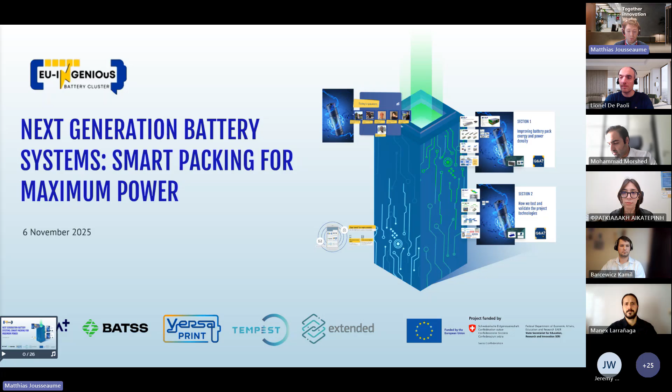So before we begin, let me introduce our speakers. I'll try not to mess up all the names. We have a lot of great speakers today, and I'll start with Mohammad Morshed at Avesta, representing Extended. Hello everyone, and thanks for your participation. This is Morshed from Avesta Battery Energy Engineering. Then we'll have Dr. Manex Larrañaga from CIDETEC, representing BATSS. Hi everyone, it's a pleasure to be here. We also have Lionel de Palmos from CEA, representing VERSAPRINT.

Hello, I'm Lionel De Paoli. Sorry, just a mistake on my name. No worries. And I represent the VERSAPRINT project. I think you didn't come alone, right? You were supposed to have also Abdullah. Exactly, Abdullah. I haven't seen his camera on. I think he might be joining right now. He's here. He will be also presenting VERSAPRINT.

Yes, of course. Great. We also have Katerina Fragkiadaki, if I say it correctly. Yes, you did great. Thank you for having me. And you'll be presenting Tempest. And we'll also have Kamil Barsevsevic. How did I do? Hello, it's Kamil Barcewicz here, and I will be representing NEXTBAT. Pretty well for the first time. Great. Without any delay, I think we can get started then.

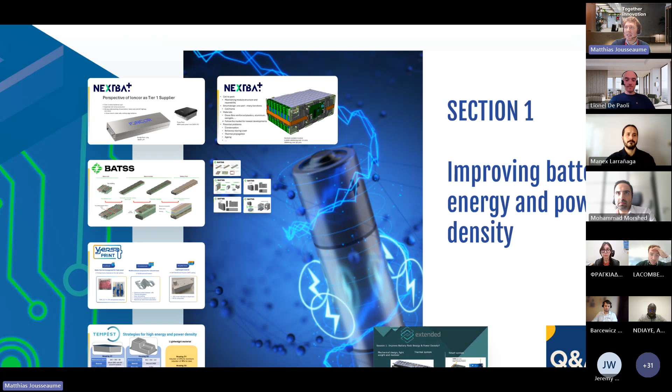You can see the different presentations. We'll go through each project. And like I said, once we're done with that, we'll go to a Q&A and have a discussion between the different experts about the project, about the perspectives for batteries in the upcoming years, and the new technologies, and all those things. But let's get started with NEXTBAT first, and I give you the floor, Kamil.

Okay, thank you. So I'm Kamil and I work at Ioncor as Senior Mechanics Specialist. And we are participating in the NEXTBAT project where we're making a semi-solid state battery module. And I want to talk about it from the perspective of Ioncor. We are a tier 1 supplier. We have expertise in serial production since we made over 3 million batteries that maybe you are using every day.

We have a strong understanding of the actual requirements of the automotive industry and all our clients. And that gives us this unique know-how to make safe batteries that are also manufacturable in serial production and don't break the bank. And I will tell more about it in the next slide. So if you go to the next slide,

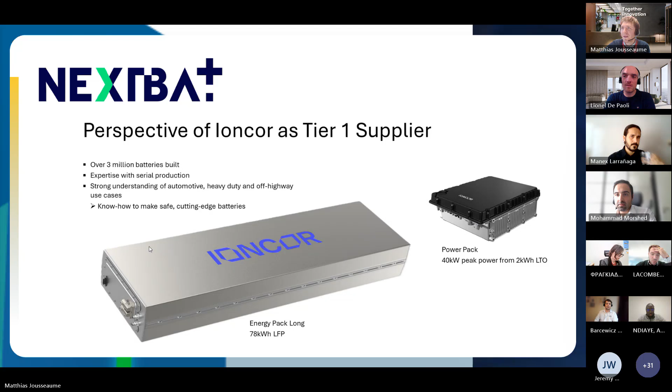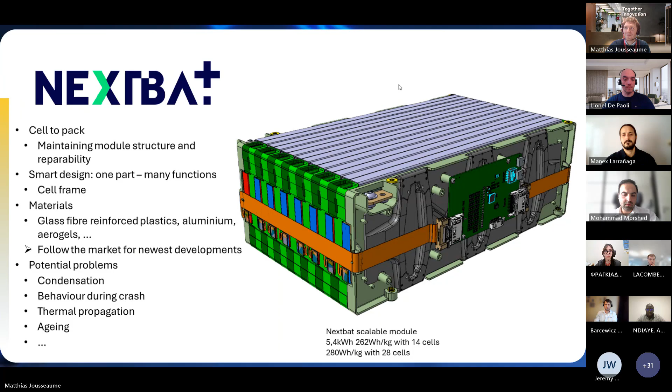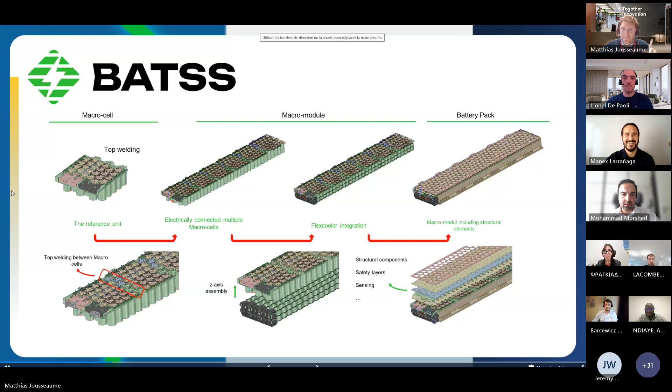Matthias, you are muted. Thank you very much for the reminder. Sorry, I was just saying thank you very much.

Kamil, we'll get back to you during the Q&A session, and now we can move on to the BATSS project. Manex, I give you the floor.

Now, this time I was the one muted. Okay, thank you very much, Matthias, and hi everyone. It's a pleasure to be here, as I said.

And now I will talk about how we developed in the BATSS project a high energy density and power density battery system that can be modular, scalable, and for different applications. And for that, the main concept we followed was the cell-to-pack conceptualization.

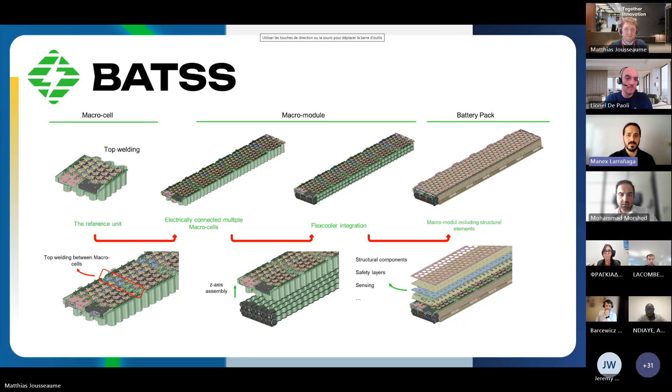Mainly considering the application constraints, instead of defining low energy and power density level battery modules to develop the configuration of the battery system pack, we use the cell-to-pack conceptualization to integrate as many battery cells as possible in the main battery system unit that will scale up following modularity concepts.

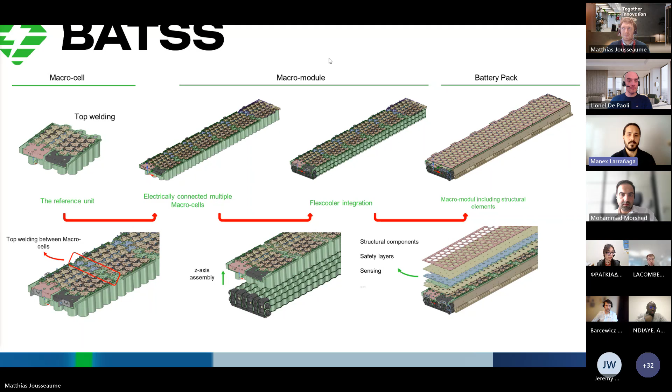So as you can see here, we defined a reference macro cell configuration that we stack in a linear way to form the macro module, the unit that provides the energy and power requirements of the application at the battery pack level. With this scaling strategy, we make the best use of the available space for integrating the battery system, which allows us to dramatically increase and improve the energy and power density of the application. Next slide, please.

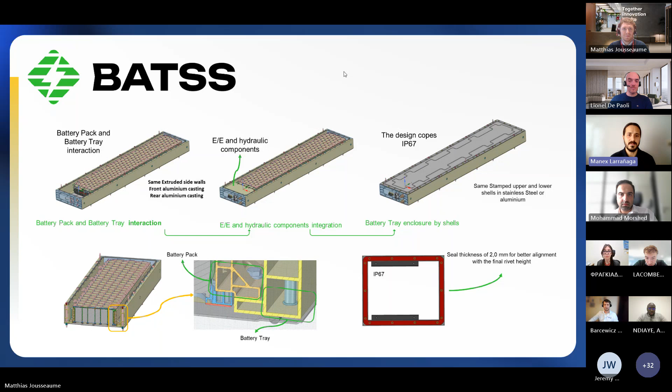Okay, after the development of the battery system, we show you here, we integrate all the electrical and electronic components in the design. We define the structural tray, and like this, we have the main battery pack unit that we integrate in the application. Next slide, please, Matthias. Okay, and like this, here we have the main application. As I mentioned before, the design we develop can fulfill the requirements of different applications.

And that's mainly because from the very beginning, we integrate modularity and scalability concepts in the design. Since we have the flexibility to include as many macro cells as needed to meet the energy and power specification of the application up to the battery pack level, and thanks to the structural battery tray and system design, we can stack the battery packs on top of each other to meet all the application requirements. And with the same design concept, we can easily adapt to different use cases in the project.

And that's really important because that was one of the main goals of this project. In this case, we developed a specific battery system for a high-performance marine application, off-road application, and to close the loop, we also address the second life application, making this a very interesting and comprehensive project. So as a summary, with this design, which integrates cell-to-pack conceptualization, modularity, and scalability concepts, we were able to use the same core design to address very different applications, such as marine or off-road, while maintaining really high energy and power density performance. And in the next slides, you will see the last designs of each application.

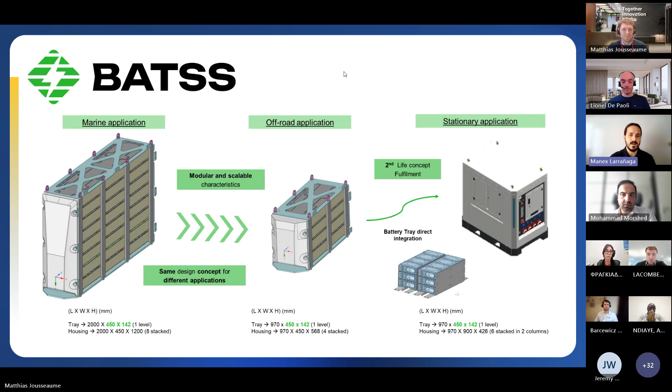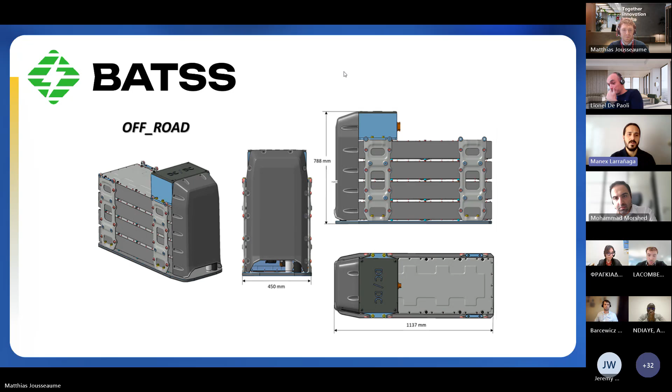This is for the maritime use case. In the next one, we have the off-road. And as you can see, the main design concept is the same, but we use this scalability and modularity aspect to go use case by use case. And finally, in the last slide, to close the loop, we have the second life application, as we can use the main tray of the off-road application to integrate directly in this second life application. And mainly, this is the main description of the design we are developing in BATSS, which I think is really interesting. So I hope that you like it.

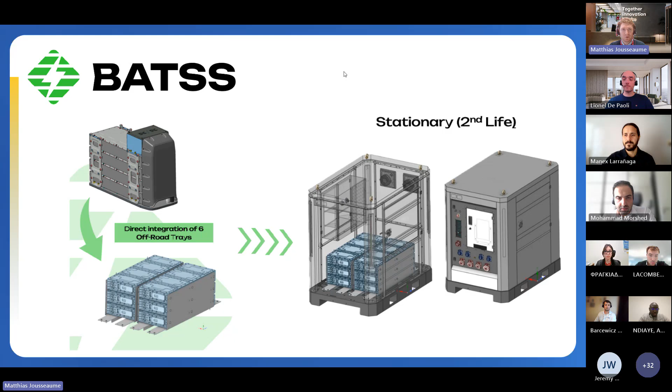Let's talk about the VERSAPRINT project. So VERSAPRINT, the name is versatility and printability. So the main strategy of this project is to develop modularity and multifunctionality with the building block aspect. So we've developed 3 main building blocks to improve the performance of the battery. First of all, at cell level, we developed a cooling channel directly on the cell that could be printable directly on the face of the cells, so it can improve the thermal aspects, thermal conductivity, and a high C rate.

We have a very good result at the end, and we can print with the silicone material directly on the cell, and we can have a channel of around 2 millimeters diameter, with good flow rates between each cell. And the second aspect of the building blocks, at the module level, in order to have a multifunctional component at this step, is to develop a multifunctional bus bar with several functionalities. First of all, to connect the power, of course, and also to disconnect one cell in order to replace it at the module level. We can improve the versatility and the second life.

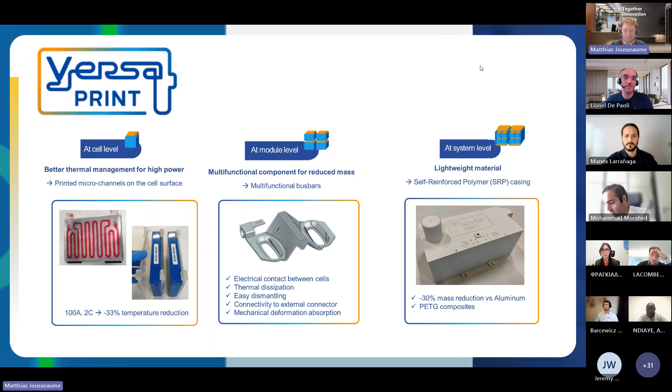presentations. But we'll move out from VERSAPRINT project and move into TEMPEST. Katerina, I give you the floor.

Hello, I am Katerina Fragkiadaki, mechanical engineer and a PhD candidate working in the Laboratory of Technology and Strength of Materials of the University of Patras. And I'm here representing the TEMPEST project. TEMPEST develops next generation safe by design lightweight batteries, including advanced module-free systems of lithium-ion and solid-state cells for 3 demonstrator types: compact, large-scale, and stationary.

And in order to strengthen Europe's global position, our objectives are to obtain higher recyclability levels, battery performance, and 15% lighter weight. So lightweight design is essential to reach high energy and power density, which is achieved by using composite materials for the battery housing instead of conventional metals. Our composite housings are made from the novel thermoplastic resin called Elium, reinforced with chopped e-glass fibers and aluminum hydroxide particles that provide fire retardancy.

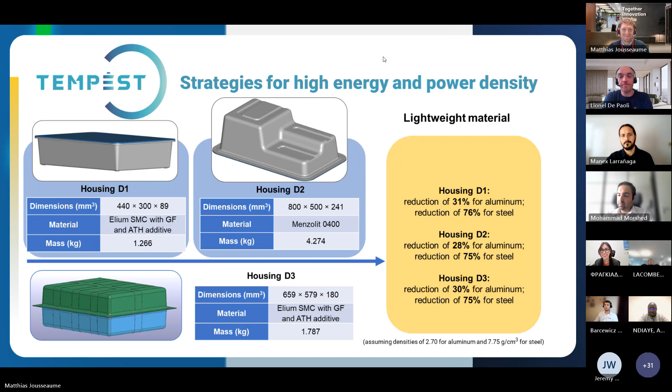Thank you. Thank you very much. Moving on from TEMPEST to Extended, our last project for the first section. I give you the floor, Mohammad.

Hello everyone, this is Morshed from Avesta Battery Energy Engineering, and our headquarters is in Belgium. We mainly focus on batteries, the whole value chain from cell to the recycling part. I just want to go one step back regarding the project. First, the Extended project is related to the next generation of multifunctional, modular, and scalable batteries. When we speak about modularity, we can have some examples. Modularity might look like the Legos that most of us have played with, small bricks, and we can make bigger things with them, or the new generation of phones that try to have different gadgets, different cameras, and such stuff.

And if we want to speak about the automotive sector, we can speak from 1920, 1930, with different types of engine, and after the World War came different chassis, to the current state, for instance the Volkswagen MEB platform, where we can have different types of systems for electric vehicles, long range, lightweight or heavier, with the same system. So that's a first understanding of the concept of modularity. And in batteries, we have a very similar story. Modular means we can use the same concept of the battery for home applications, electric vehicles, heavy duty, marine, and aviation.

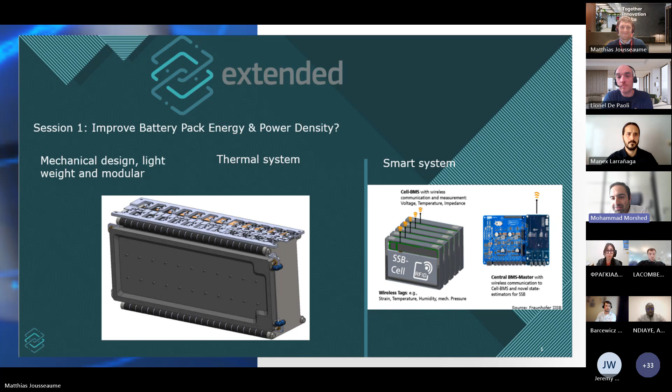Now I see we already have a couple of questions in the comment section. That's great. We'll go to them right after. I just want to start with an open question, something quite vague. Everyone can answer, just one at a time, I would suggest, so that we hear everyone. So what are the challenges when increasing energy density? Does anyone feel like starting this? Great. Go ahead.

Can I? Yeah. Okay. So regarding energy density improvement, we have different issues in different sectors. For instance, for electric vehicles, it's the longer driving range without increasing the battery weight. This is the most complicated part from my understanding. And then for portable electronics, we need smaller and lighter.

Very clear. Then I have two questions for Camille. Can you explain the venting concept briefly? And the second question is, did you do a TP test already? If yes, what was the result? How did you trigger the cell? So the venting concept, maybe if you would go to the slide where we can see our pack. Let me just go back real quickly. So this one. Yes. So in the corners, you can see the openings in the cell frames.

And let's start with the fact that this is just a module. A module on its own doesn't have a TP concept. It is always a combination of the module and the housing. So that's a very important part that is missing here. Also, the cooling plate plays a big role in the TP situation. So just looking at the module on its own and discussing TP, it shouldn't be done. But we have a concept.

We have the holes here in the corners, and in our testing jig we'll also have space for the gases to escape through. So the point is to get the gases out from between the cells to the outside of the module and then direct them to the outside of the pack.

And then the nailing test. Yeah, we're going to drive a nail from above here, as you can see from the picture. We'll make a little hole in the aluminum plate here, and we'll drive the nail into the thin side of the cell. We haven't done the tests yet, so we cannot tell about the results.

Yes, I hope they will follow the social media, the channels and the deliverables published publicly to know the answer. Yeah, I guess so. That's quite a new cell also to us. It's semi-solid state, so quite a different beast from the NMC. So I'm curious myself about the results.

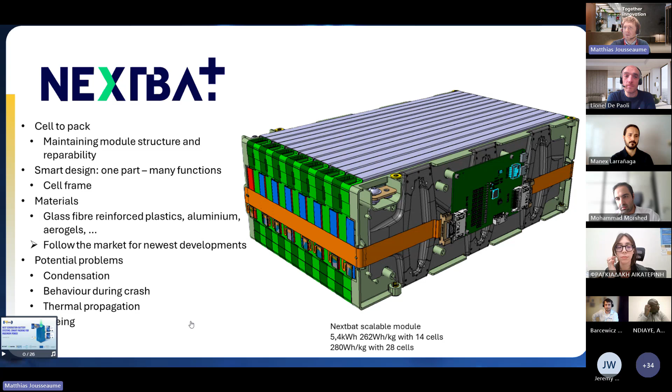Well, great. I'll go back to the Q&A, and I think now we move to two questions to Katerina. First one being, have you done any testing for those trays in operating conditions with cells? And the second question is, who will manufacture the housings?

Yes, well, we haven't tested both the cells and the housings together yet, only single components in operating conditions. And the housings are manufactured by Fraunhofer ICT. The two demonstrators, D1 and D2, have already been manufactured, and the third one, the stationary one, will be finished at the end of the year.

Great. I don't see any other questions in the chat, but I have a couple for you all. So multiple times during the discussion, I think the trends came about. So how do you keep an eye out for the newest materials and developments in the battery sector? Do you have any good advice? Does anyone want to answer? Yeah, maybe.

So what I do is I follow up with the manufacturers. I go to events like Battery Show, FIMA, things like this, and get in touch with the suppliers. They are the first source of the information. They know the products that will still be coming, and they can provide you samples that you can test yourself. Then, of course, follow online webinars, just like this, but about materials. That's what I do in the technology development of Ioncor.

to the second section, how we test and validate the project technologies. This ensures our innovations meet the highest standards of safety, regulation, and performance. Since all of our projects are reaching the second half, we can finally talk about this. The testing, the validation, this is very important, I think, and I'm very excited to hear your thoughts on this. We'll go through the same order as last time. NEXTBAT, you can start. Yes, thank you.

So, in the ideal case, mechanical design, or design in general, should go hand in hand with the simulations from the very beginning, and that's what we try to do here in the NEXTBAT project. Since we have pouch cells, we went first with the simulation of the swelling of the cells. Cells swell during their cycling. The lithium goes into the graphite and makes the cell swell, and it of course puts the whole module under mechanical stress. We did finite element method simulations to see how the pack behaves.

At the same time, we also did CFD simulations where we tested the thermal behavior of the whole module. The cells heat up during cycling, the bus bars heat up. This also causes mechanical stresses. Then we reiterated the design phase and simulated again. And now we are at the stage of building the actual physical prototype. Once this is done, in a few weeks, we'll start the physical testing.

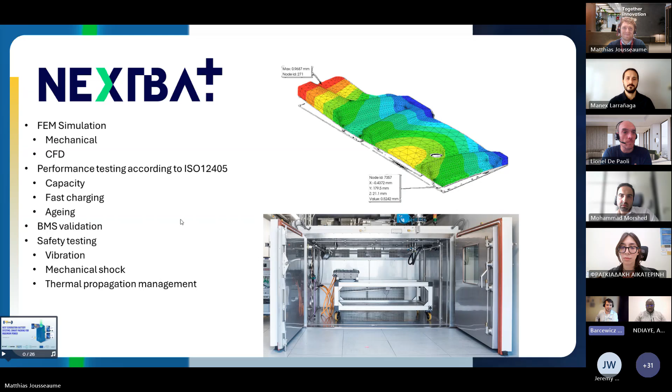We are hoping for no propagation, of course. That's what we have achieved at Ioncor with NMC cells. But this is a solid state cell, so we're curious about the results ourselves. Thank you.

Thank you very much. Moving on to the BATSS project. Yeah, Manex, back again. So to validate our approaches, like all of us, we use experimental and numerical environments. In this presentation, I will present the main work we have developed in the project, and other aspects I may mention at the end. As you can see, we developed the main experimental evaluation and the numerical one, and since both are iterative and self-reinforcing processes, I think that's really, really important.

For example, in the experimental validation, while we were developing the main conceptual design of the battery system at CAD level, we first developed the preliminary cell level characterization to evaluate the performance of the battery cell and used the information as a reference to build and validate the cell level numerical models. This is at cell level.

On the other hand, to validate the preliminary design of the battery system and evaluate the performance of the approach we were proposing in the project, we developed a downscaled battery module, with the same components and characteristics as the ones we were designing for the main application, but at a lower energy and power level.

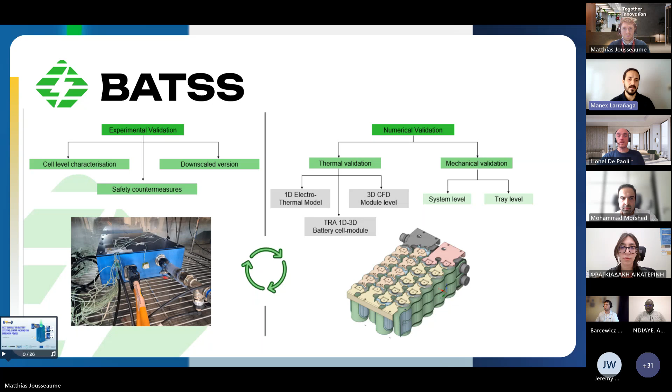And of course, all this experimental information is really useful to validate the proposed design performance, but it is really useful too to validate the numerical models that we are developing in the numerical environment. Next slide, please. I mean, next one, I think I missed one. Okay, that was the one regarding the experimental one at cell level and at the downscale module level.

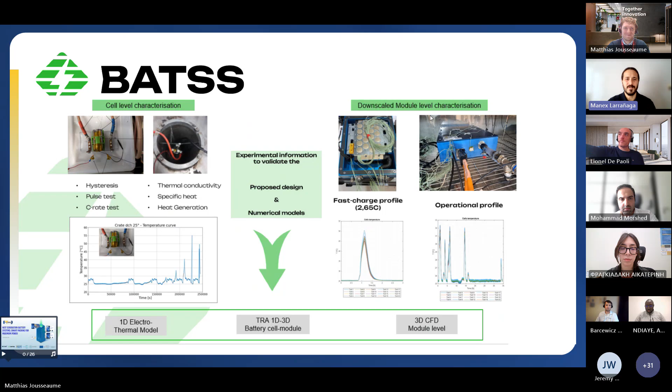And if you go to the next one, at the numerical level, as you can see, we have different approaches. We have the 1D electrothermal models that are more focused on system level performance evaluation, parametric strategies, all this stuff. Apart from that, we have specific models to evaluate the thermal runaway and venting processes at 1D and 3D. And these are more regarding the safety aspects of the battery system, which type of safety materials we have to integrate, how we proceed in this type of phenomena and events.

And finally, we have developed, considering the electrothermal environment, the 3D CFD numerical analysis. This is really interesting to evaluate the 3D thermal response of the battery system, the hydraulic distribution, all these specific aspects, and to propose additional design solutions. And these are more or less correlated with the experimental approaches we got. So it's really useful because we use the experimental information, apart from validating our design, to validate our models. And after the validation, we start with the optimization strategies and all this stuff.

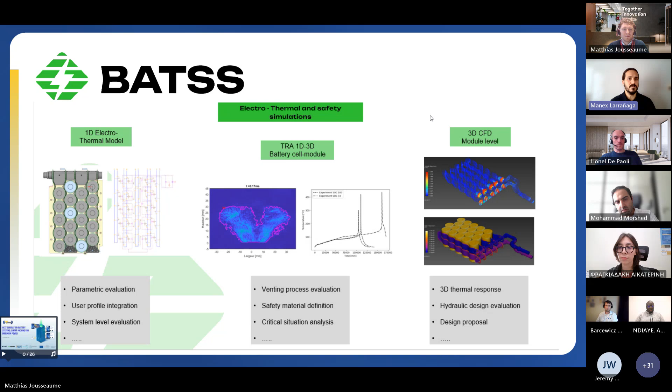And finally, in the next slide, we have the mechanical simulation approach. The thermoelectrical evaluation is perfect to evaluate how the battery system will answer in specific working conditions. But apart from that, if you are designing a specific battery system, you have to evaluate the mechanical response of this system. In this project, we split this evaluation in two working lines. The first one was based on the system level, where we evaluate the whole battery system for the off-road and marine application, considering a specific working condition and a specific standard for these use cases.

And apart from that, we develop a more specific mechanical simulation only evaluating the battery pack, integrating all the components, considering safety layers, structural layers, battery cells, cooling strategy, to have a more realistic and more specific mechanical response of the battery system. More or less, this is how we validate. This is the approach we developed until now, and now we will integrate additional evaluation and validation processes with bigger level battery systems experimentally, where we evaluate all the mechanical aspects, the thermoelectrical aspects, and all this stuff. That is what I have to say in this aspect. So thank you very much.

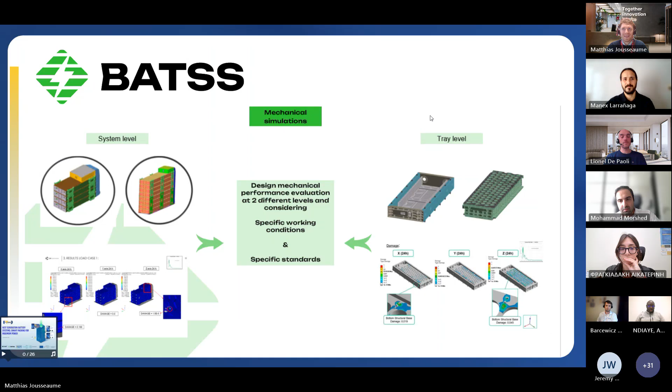Thank you. I think we can now move on to VersaPrint. Abdoulaye? I think you're currently muted. Sorry.

Abdoulaye for Open Mobility. I am validation group leader in charge of validation of components and products such as cell, module, or pack. For VersaPrint, we will perform the tests. We have two approaches. The first one is the verification of prototypes for aeronautics and automotive. The last one is a simulation for marine application. One of the main challenges of this project is reducing the total weight to optimize the power density. And the strength of VersaPrint is the building of prototypes.

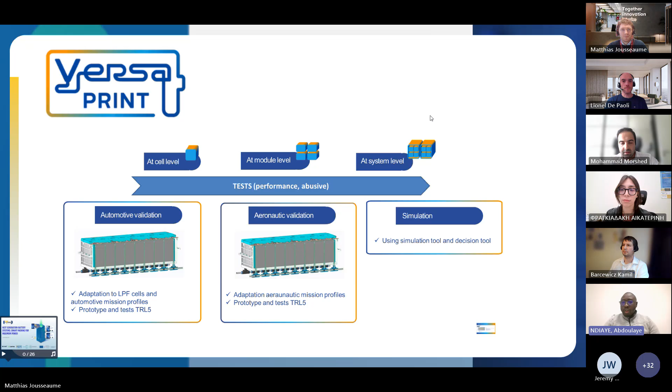So for the moment, we have no requirement. We can go on to the next page. As I said, we have no requirement, but we need to check the state of the art of the capability for many applications. So we perform mechanical tests, environmental tests, and abuse tests. But today we will focus on performance tests according to ISO 12405, like Kamil. And for this project, I am in charge of tests for automotive applications.

To perform these tests, we make some instrumentation to monitor voltage, currents, and temperatures. We have one list of tests. The first one is energy and capacity at room temperature. The aim of this test is to check the impact of the assembly versus the cell datasheet, or we can perform tests at cell level. We hope we will have no impact of the assembly, for example, on the bus bar and so on. And the aim is to reduce that impact to the maximum.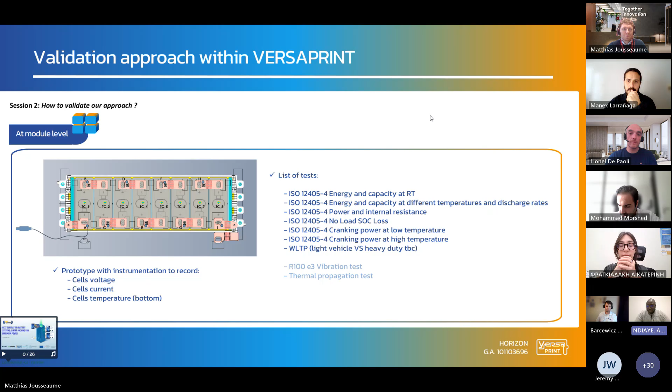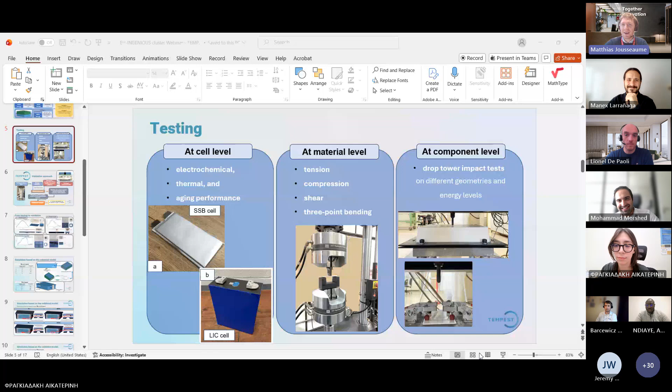Thank you. Thank you very much. Moving on from VERSAPRINT to TEMPEST, Katerina? Yes, can I please share my screen, because I've changed the slides a bit, or no? You're muted, Matthias. Good to know. Again, I was saying I stopped sharing my screen. You should be able to do it. Yeah, we're seeing your screen.

All right. Thank you. So regarding testing and validation, in TEMPEST we perform a multi-scale testing campaign to capture both the electrical and the mechanical behavior, in order to ensure safety, reliability, and performance of the battery systems, while providing experimental results for accurate simulations. At the cell level, we evaluate the electrochemical, thermal, and aging behavior of the cells, measuring the discharge capacity and state of health at different operating conditions.

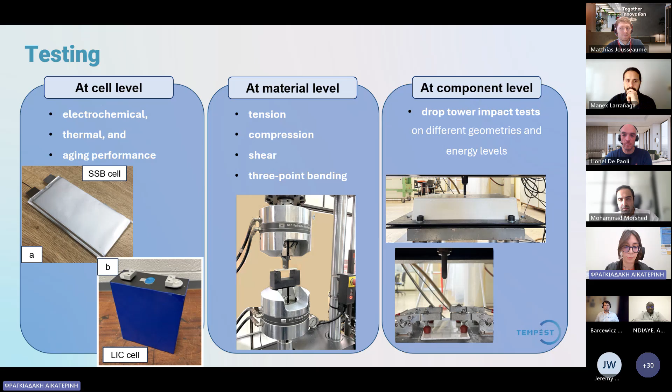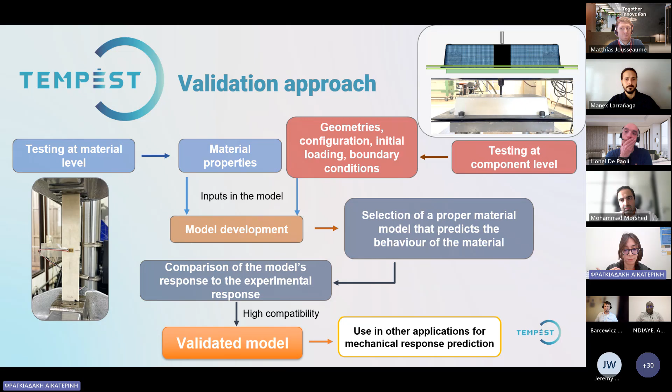At the material level, we perform standardized mechanical tests to extract reliable data for our models. And at the component level, we evaluate structural integrity of the housing at different energy levels and configurations. This experimental work feeds into the model validation process, allowing us to confirm that our simulations accurately reproduce real-world behavior. Component level validation occurs when the simulation and experimental results align, providing a predictive framework for further testing and safety evaluation.

Here we have a comparison, a transition from the physical drop tower testing to a validated simulation. As we can see, both the force-time responses as well as the inflicted damage are accurately represented for different levels of energy: 7.5 joules and 30 joules. We can also see barely visible damage and visible damage for different geometries, composite plates, and the housing, confirming the reliability of the validated model.

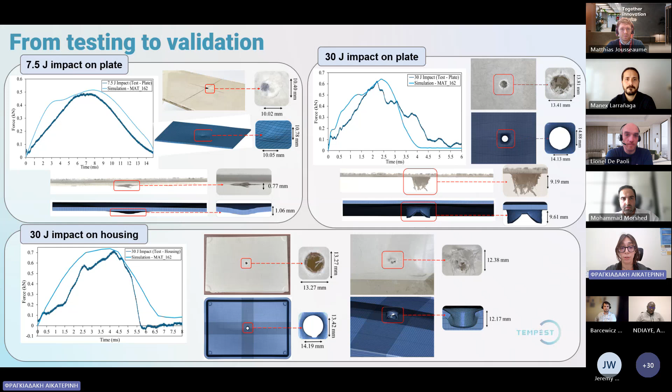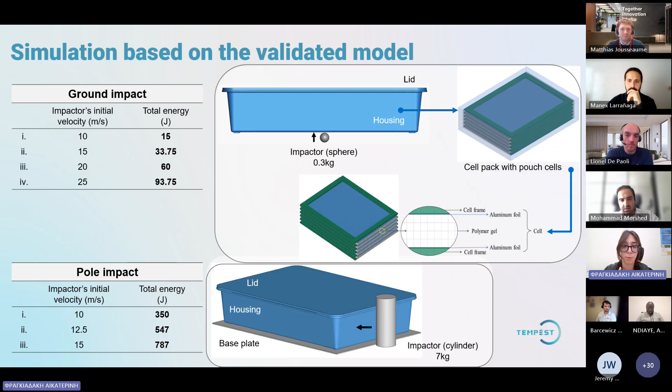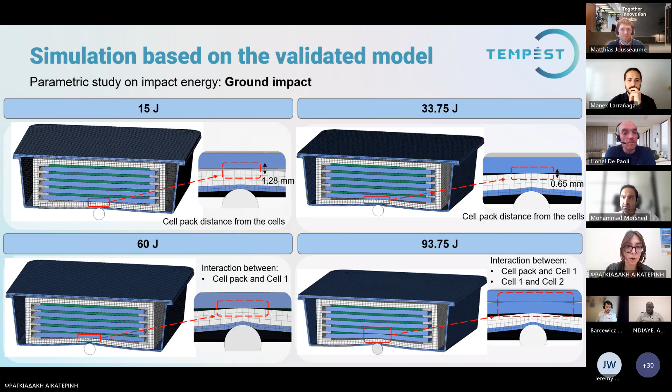This allows us to use the validated model for different loading scenarios that can be catastrophic to the battery system, namely different cases of crash and ground impact. In the ground impact model, the cell pack is also modeled using a homogenized approach for the pouch cells. Here we can see that with increasing severity of the impact, the cells might be affected, even though the housing maintains its structure. Whereas in the crash simulations, the housing, although it gets severely deformed, succeeds in protecting the cells, which sustain their mechanical integrity.

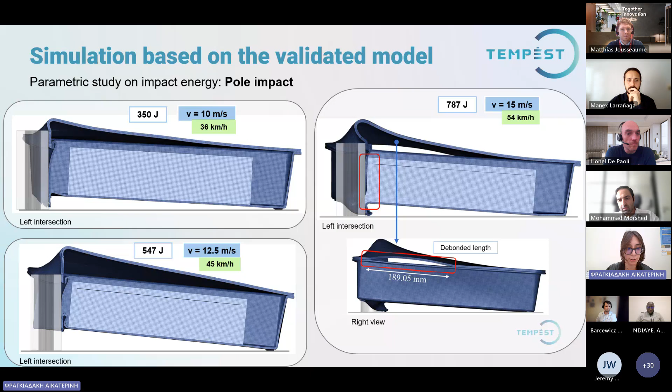And for our work on validation and structural integrity, we have also published a paper for you to check out. So thank you very much for your attention, and I'm open to any of your questions.

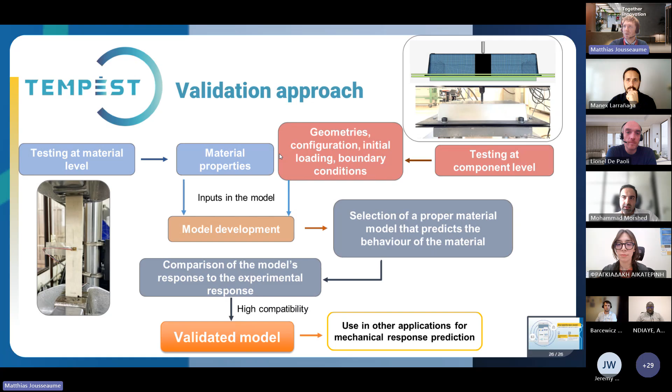Thank you very much for the extra slides. I think it really helped everyone to understand your project. I'll just share my screen again. I think you should see it now, and we'll move from Tempest to the next project, Extended. I give you the floor.

Hello again. Most of our colleagues have covered the whole concept, and this is the same: the 0D, 1D, and 3D simulation, and then very nice rainbow pictures. They are animations; I'm not sure it's possible to run them here. I don't think so, no. Okay, so as we have spoken, we do the 0D to consider the worst case, and 1D and 3D simulation, and I just want to add these new parts, because otherwise it's just repetition, regarding validating the approaches.

Some parts that I think must be valuable to mention is that after these types of very valuable parts, I mean the simulations, the next point will be the test at the environmental level for each part, then the component test, and then the whole system testing, which should be added.

And the next important point, so that we can scale it up, will be reaching an MVP, minimal viable product, mostly in TRL5 or TRL6. It is a very valuable part, but I think it has an exponential behavior if we want to reach the real market. When we do the test in a coin cell or in a part with very limited conditions, most of the time it works and it is very valuable. However, reaching the market might need much more effort, and these types of knowledge can be transferred if we are able to reduce the time to market.

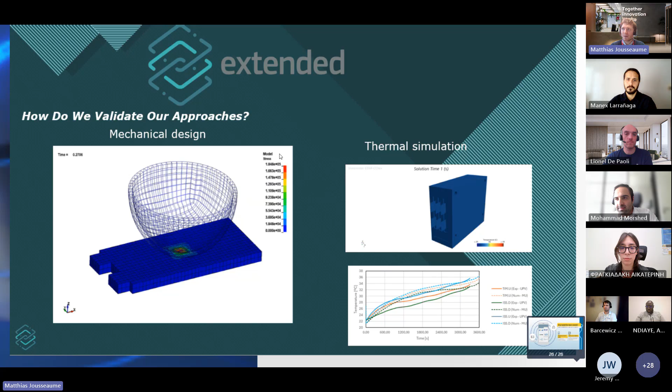So far, we only have 2 questions in. We'll wait a bit more for questions, but I can start with one. What are common challenges in battery system validation? I think that's quite generic. It can serve all projects. So I'd love to have all of your points of view on this. Does anyone want to start? Well, then let's go by the order we did during the presentation. So I guess it's me again.

So the question was common challenges in battery system validation. Yeah, validation. I'm not from the validation team, so maybe it can be a little bit difficult for me. But I would say one of the challenges is actually the high cost of the whole testing process and the time it takes. That's from my point of view. Sounds reasonable. I think we can move on to Bats.

Yeah, I think for the validation process, first of all, you have to define the references that you have to use to validate the approaches. And this is for all the projects. So it's really important to properly define the main references that you are going to use for validation.